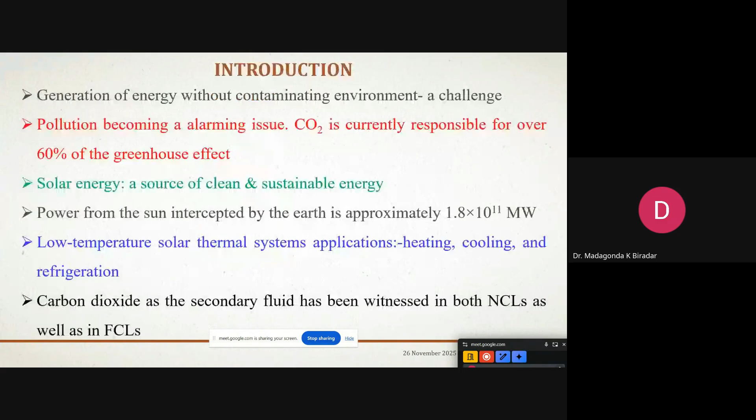So if we move forward, we know the non-renewable and renewable energy sources. Today we are witnessing the price of petrol or diesel. When we were in childhood, the petrol price was around 30 rupees per liter. So today we are witnessing 104 rupees per liter, even though we are not compromising on buying cars or automobiles.

Because of this, the prices are going higher and higher, and we are not meeting the demand of the customers or the world. Even the coal that India has as reserves, we are not having it in pure form. Sometimes we are importing coal from outside. So here the availability is very less.

Even if you consider nuclear energy - we know if you use 1 kg of uranium, it will give tremendous energy or electricity to utilize. But the drawback, we already know about Marie Curie - how she did all the research on that.

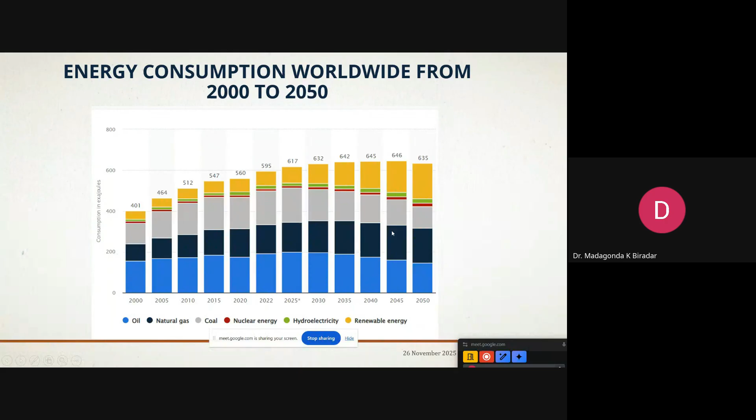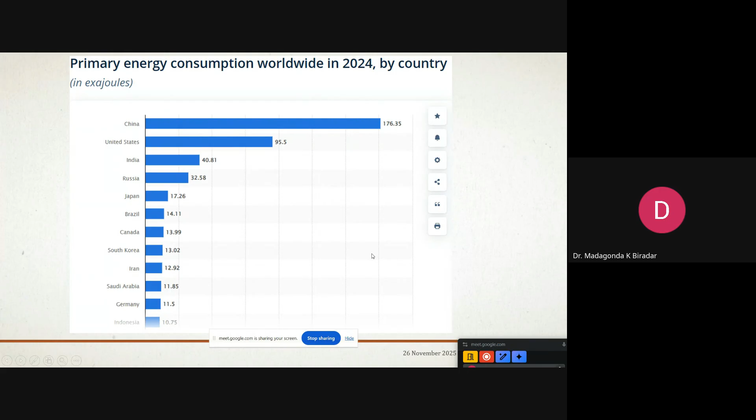So one should think about alternative resources. As we already discussed about renewable energy sources, solar stands in first position. Let's see how we can utilize solar energy.

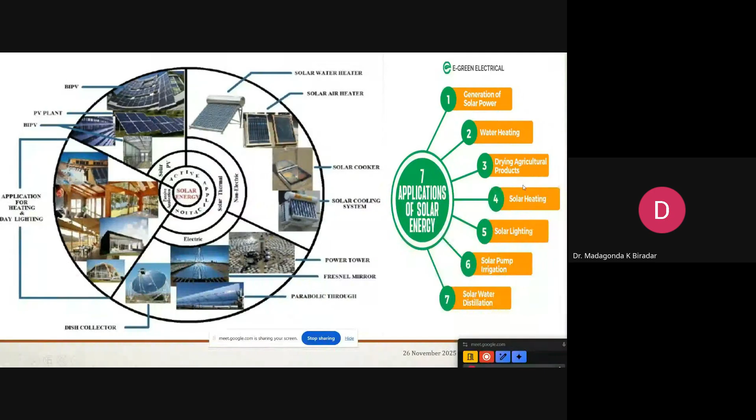So there are 7 different applications of solar energy. That is the generation of solar power, water heating, even drying agriculture products, solar heating, solar lighting, solar pump irrigation, and solar distillation.

So now, out of this, we are diving towards the solar water heater system. This is the basic one which everyone requires, right? So we are getting the solar energy for like vitamin D. At the same time, everywhere in India or throughout the world, the heating of water mainly, basically, we are using the solar energy.

So there, the concept, if you think about the solar water heater, the world's first solar collector was invented in 1767 by the Swiss researcher Horace de Saussure.

And later, there was advancement in the solar water heater, because what happened in the 20th century, because of World War One and Two, there was a crisis of energy. Because of this, what happened? The spiking of oil prices, right? So that made more research or dive into solar energy development even further.

So that's why, if you're all aware, from the last 15 years we are having more focus on solar energy, mainly installation of PV cells and as well as installation of solar water heaters.

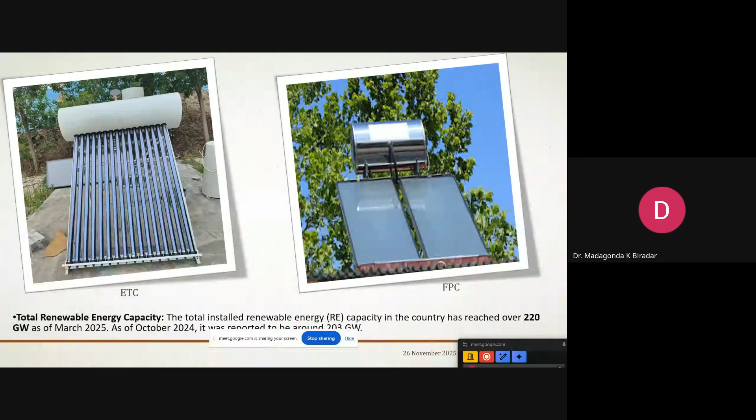Why not the flat plate collector? And why am I more focusing on the flat plate collector? So we can see here. If you see the comparison of this ETC and flat plate, as we know, quick heat generation happens in the ETC because of the vacuum. But in a flat plate collector, what happens? It will be like a box where the solar energy has to be absorbed by the absorber, which will take more time. So that's why the efficiency of the ETC is more than the flat plate collector.

So even the convection and convective losses are low here, but in the flat plate collector, because of the box, we have to insulate from all sides apart from the top layer, right? So there the losses will be more. As we know, if the temperature of the surrounding increases, then the absorber temperature also increases, and because of this, the losses will be more.

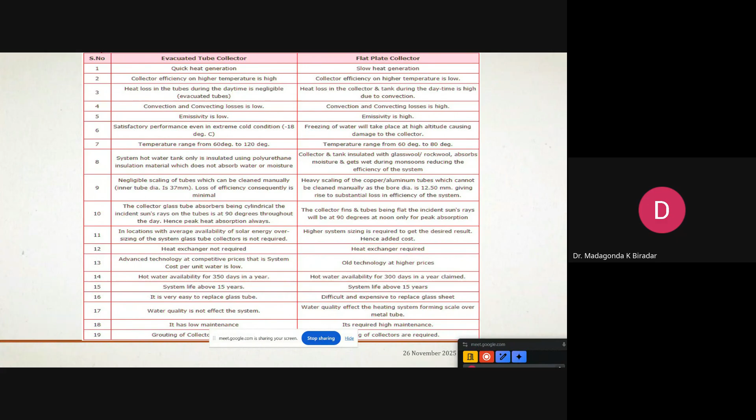So we will discuss that later. If you compare the ETC, the emissivity is also less, right? Then the temperature range of the ETC will be around 60 to 120 degree Celsius, but in the flat plate, 60 to 80 degrees. Like we have the advantage. If you compare the flat plate and the ETC, we have all these advantages in the ETC.

But why am I focusing on the flat plate collector?

So one should think about this flat plate collector, because even if you see the price of the ETC and the flat plate collector—the flat plate collector is almost maximum 10,000 rupees for 150 liter capacity, or even less than that. But the ETC cost will be more than that, almost double.

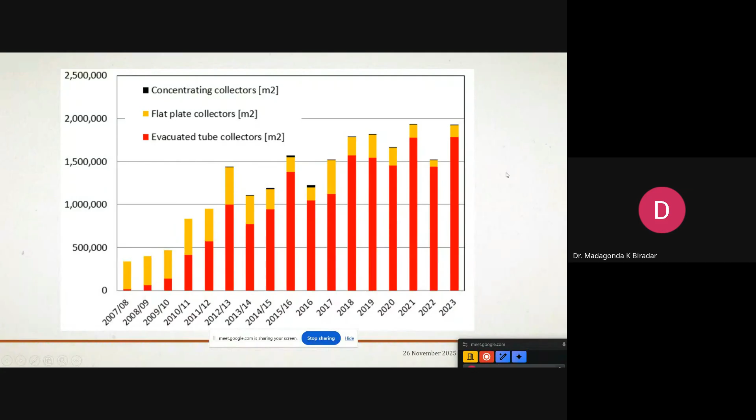So the applications of this flat plate collector, here we are seeing different ones in yellow color. Where these are installed—mainly if you consider hospitals, guest houses, hostels, where the maximum number of human beings are staying or the requirement of water is more—there the cost also matters. So flat plate collectors are installed in such applications or locations.

So that's why we were focusing on this flat plate collector instead of ETC earlier, so that we can improve the efficiency of the flat plate collector, so that every individual can have the flat plate collector in their home or their places. Before moving to the improvement in the flat plate collector...

I will tell about the different circulations of this loop or cycle. Mainly, if you see the solar water heater, we are not using any pump or heater in the solar water heater.

But today we even have that provision, like winter—it has started. If you go to North India, the temperature today, even in Pune region, we are witnessing around 10 degrees Celsius. But if you go to North India, it will be less than 3, 4 degrees. So there, today if you go and buy the solar water heater system, there the suppliers have the provision that a heater will be installed.

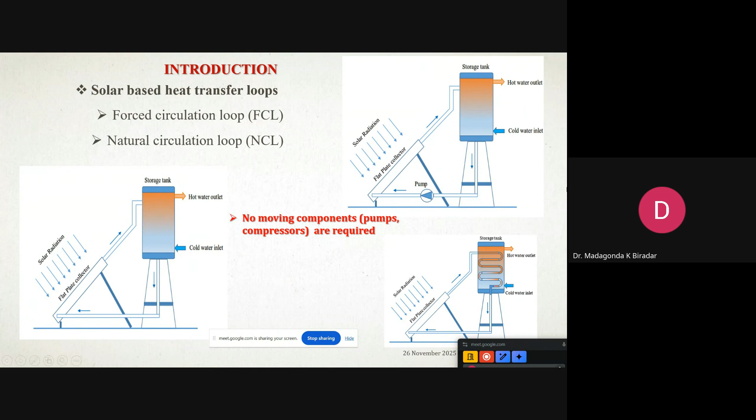So that is the natural circulation loop, which is a closed loop, which we call the natural circulation loop. It's not only used in heating - even in the nuclear power plant reactors, we use this NCL, that is a natural circulation loop. So one should utilize this natural circulation loop so that we can minimize energy consumption.

So in a natural circulation loop, whatever fluid is inside, it may be different fluids, which is absorbing heat from the solar radiation in a collector, and exchanging the heat in the storage tank. Circulation of this loop is maintained due to the buoyancy effect - that's why we call it a natural circulation loop. The fluid flows because of the density difference and the buoyancy effect.

So almost this solar water heater, which is inclined, normally up to 45-degree inclination - because of this inclination, the heated fluid will go to an upper level. This happens because of the buoyancy effect. Now if you come towards this natural circulation loop, there are different types of loops, depending on the applications.

If you see these figures, one is the point heat source and point heat sink, toroidal loop, or rectangular loop. There are different types of applications. If you consider the shape of the loop, this shape, whatever we see in the toroidal loop, even the tube and tube heat exchanger, like that.

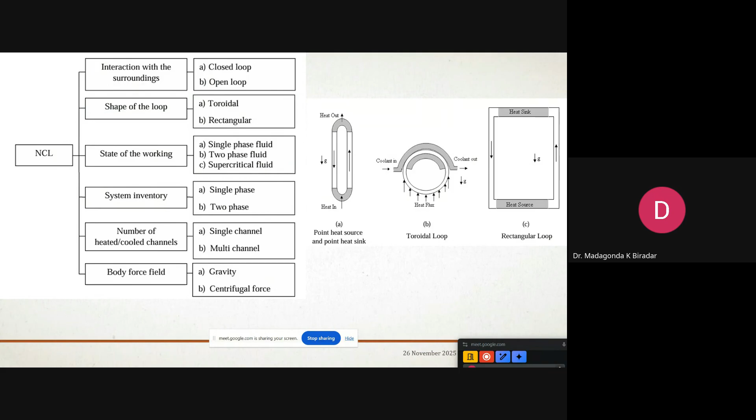So what is the advantage of this NCL, or the natural circulation loop? We are not using any blower or compressor. Because of this, it has low cost and becomes simpler. And as I told earlier, no pumps are there. Because of this, improved flow circulation happens, and flow has different structures and safety concerns.

So because we are working with atmospheric pressure, the disadvantage of this NCL is that it requires the driving head, as we discussed in the earlier slide. In the morning, it is very difficult to get hot water from the solar water heater. That means the driving force requirement is more. That is one thing.

Then less mass flux. The amount of flow of the fluid is less, so it will have instability also. Sometimes in an inclined pipe, when the fluid gets heated, the heated fluid again comes in contact with the low temperature fluid, so it mixes up there itself. That's why instability comes into picture, and low pressure, low flow regime also happens.

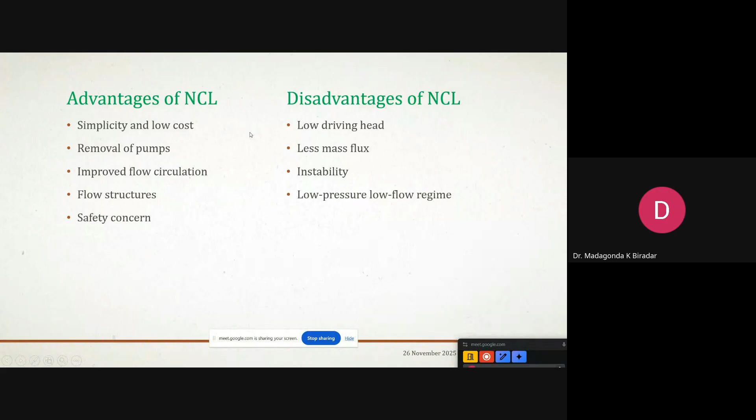So one should have proper utilization of this NCL, which depends on the selection of the working fluids. To overcome these disadvantages of NCL, we should have proper selection of these working fluids.

The fluid we use should be low viscous, and it should have a low freezing point. Even see the example of putting nitrogen in the tires of automobiles, because the expansion or heat carrying capacity will be more, meaning it will not get heated as much as normal air. Even though air has more nitrogen percentage, we put pure nitrogen into the vehicles.

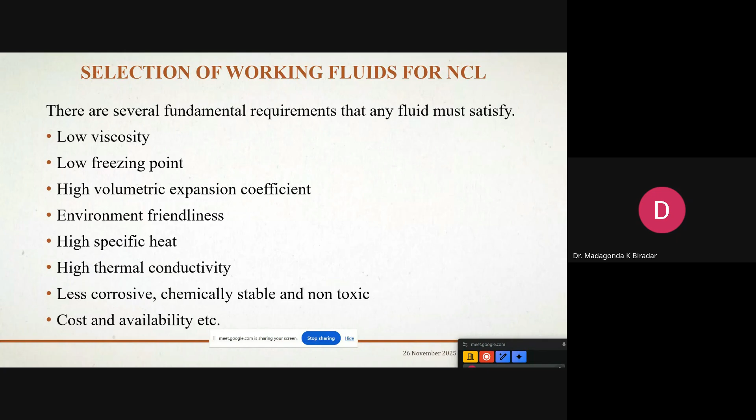So in a solar water heater or natural circulation loop, one should think about all these points: low viscosity, low freezing point, high volumetric expansion coefficient, because once it gets heated, it should expand, meaning that should be high. Environment friendliness, high specific heat, high thermal conductivity, non-corrosive, chemically stable, and non-toxic. Also it should be available abundantly everywhere in nature, and cost should be minimized. If availability is more, then definitely the cost of that thing will be less. So one should think about this while selecting the fluids.

So this natural circulation loop, as we discussed earlier - what are the different applications of these things? One is the solar thermal system, for example the solar water heater, or geothermal power plant.

We are not going in detail, but this is where we use the natural circulation loop - whatever heat energy comes from the heat source up to the turbine, the natural circulation loop plays a vital role. Then also in thermal power plants like boiler furnaces, even today they are using NCLs. Even if you go to a sugar factory, there are superheaters there using the natural circulation loop.

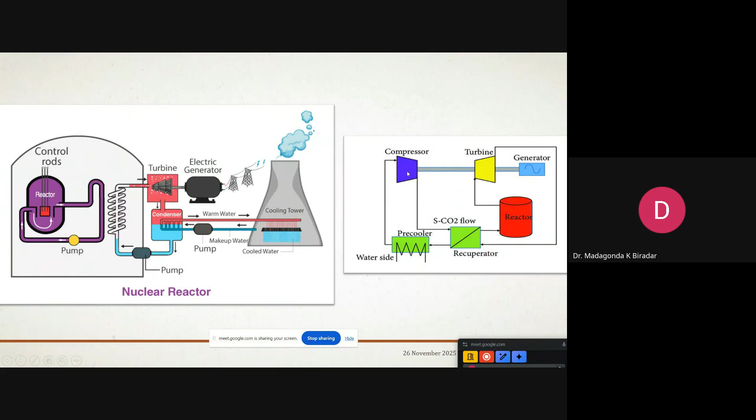And while using the natural circulation loop, there are different fluids available, like the refrigerants we use. If you see, every 2 to 3 years or 5 years, we get different names of refrigerants, right? So the suitability of all these refrigerants or secondary fluids is very important.

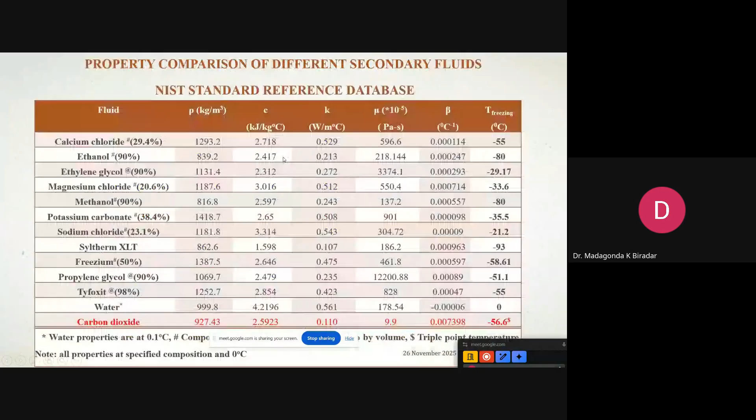So this we analyzed with the help of RefProp. RefProp is a software where we can get all the different physical properties of any fluid. If you compare CO2 liquid at 60 bar, we see solid, liquid, and supercritical phases. Supercritical comes after 31 degrees Celsius, and the liquid phase is from minus 57 degrees up to 31 degrees Celsius.

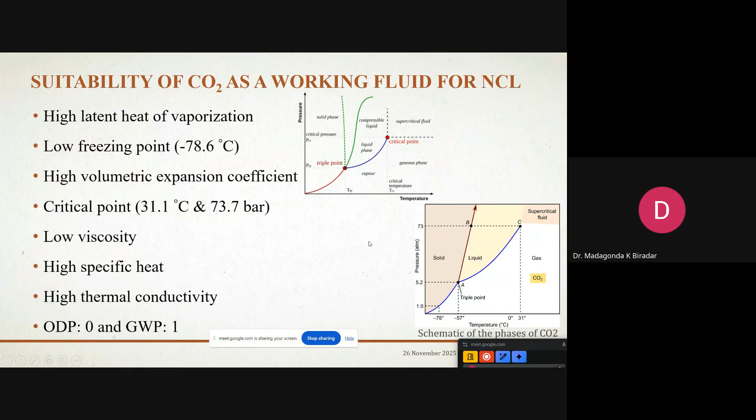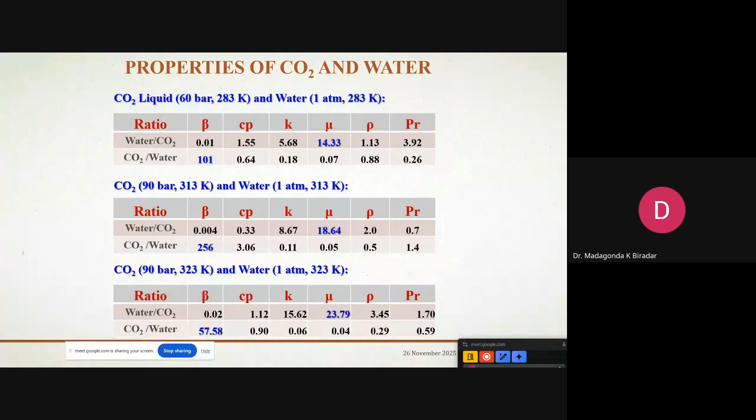If you see again the supercritical at 323 Kelvin, means 50 degrees Celsius, the CO2 to water ratio is again decreasing a little bit. This we'll discuss later, because what happens is even in a solar water heater, as the outside temperature increases, surrounding temperature increases, the efficiency of the collector also decreases. We'll discuss that. So we got the result in terms of different pressure.

We compared this water-based system with the CO2-based system. Water is normally used at 1 atmospheric pressure, but CO2 at different pressures, 50, 60, 70 bar. Here the T average is 283, which is in liquid phase, and T average is 323 K, which is in the supercritical.

If you see these two figures, the heat transfer rate - this bottom line indicates the water line, with a star in the water line, and with increase of pressure with the CO2. The blue line indicates 70 bar, then red 60 bar, and black is 50 bar. If you compare CO2 with water, increasing the pressure, CO2 is far better in the liquid. Even at lower pressure, it gives better results than water.

At the same time, for the supercritical, water is at 1 atmospheric, but 80 bar is just below this water line. This we will discuss later, because the pseudo-critical temperature, pseudo-critical point comes into picture here. Even at 90 bar, which has more heat transfer, than if you see the temperature difference, delta T, means inlet and outlet temperature, here it is up to 400 watts.

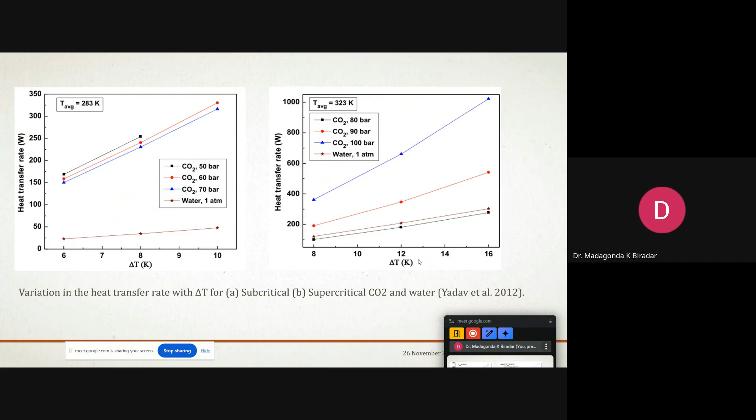Okay, so here what happens - the CO2 supercritical based system will have the more advantage.

So with this, what we observed is that the major studies have been conducted on direct type water-based solar thermal systems, as currently we see all the rooftops with solar water heaters. But there is a scant of research on indirect type CO2-based solar thermal systems. Meaning instead of direct water, we can use different fluids in that loop and utilize it with the help of a heat exchanger. So that is not available in the market as well as in society. That's why one should have proper research with experimental and numerical studies on this. So that's why we are more focusing on the flat plate solar collector.

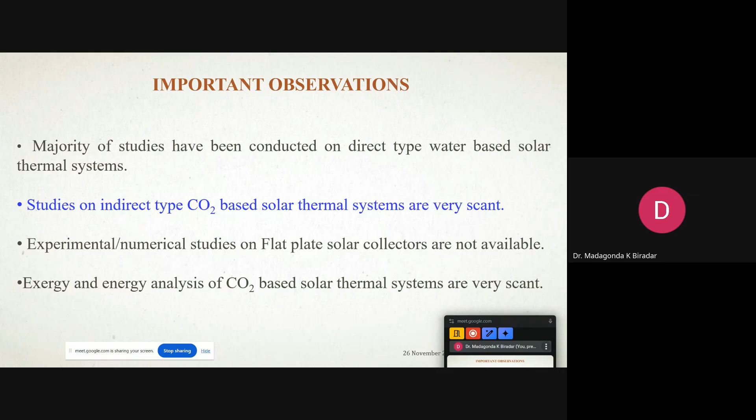If we do good research in this area of flat plate solar collectors, maybe with experimental, numerical, or energy analysis, it will definitely give more advantage than the ETC. There we can also minimize the utilization or cost of the system.

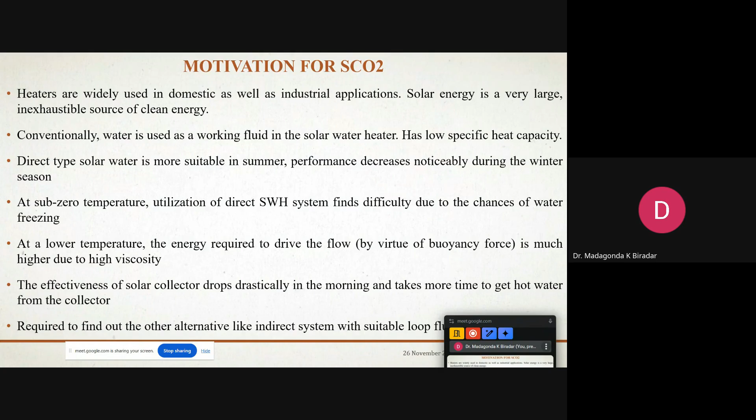So this is the motivation for this supercritical CO2 based, direct type solar water heater, which is more suitable only in summer, but in winter water will freeze. That's why the driving force required will be more, and sometimes the system will burst.

So we thought to work with CFD analysis, as well as numerical analysis and experimental work. This is the system where we converted the normal one—actually, this is not a converted one, we fabricated it ourselves with compatibility for the CO2 based system.

Normally whatever tubes we use inside this collector are copper tubes, but copper is not suitable for higher pressure, because CO2 has a critical temperature of 31 degrees Celsius, where it reaches up to 73 bar. This summer we witnessed temperatures up to 50 degrees Celsius. You can get the data from RefProp—at 50 degrees Celsius, the pressure will be very high, which is very difficult for copper tubes to handle.

So here, this is the schematic diagram of this CO2 based solar thermal system, and here we have the inclination of this collector. This is where we can make different inclinations depending on the different geography, altitude, and latitude of that particular location.

Here we made some assumptions: the loop fluid and external fluid streams are in single phase—we did not consider multi-phase since that is very difficult to analyze. The external pipes of the heat exchanger, bottom side, and solar collector are all perfectly insulated since we're considering a flat plate collector. Water properties are estimated at the inlet temperature itself, and fouling in the loop is neglected entirely.

We did the energy analysis as well as the exergy analysis. For energy, you can see here, Q equals MCp delta T, the total utilization of energy, which is nothing but the absorbed energy minus losses.

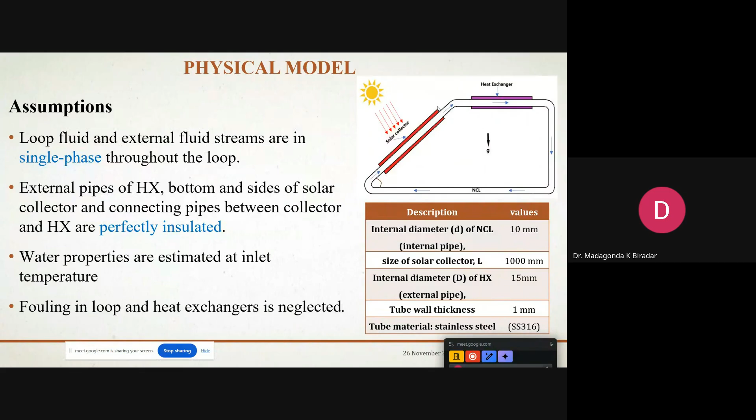In a solar water heater, losses will be more. The absorbed energy depends on transmittivity and absorptivity—considering tau and alpha, that is the absorptivity. The utilization is nothing but MCp delta T, where T out is the fluid coming out of the collector, and T in is the inlet of the collector. Then the losses happen at the top of the collector, as you can see here.

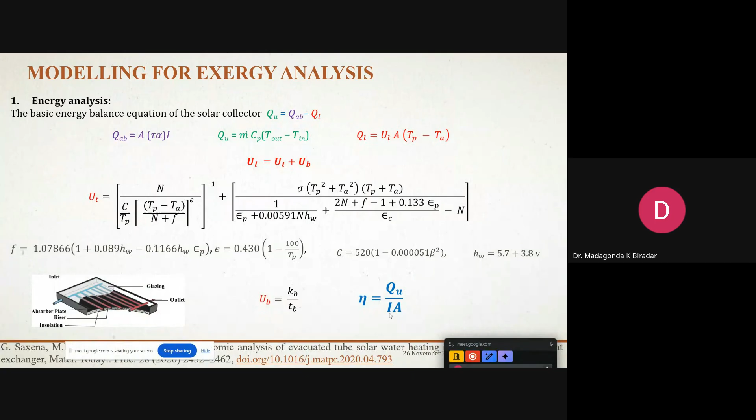TP is the plate temperature, TA is the ambient temperature. As the ambient temperature increases, losses will be more, as we have seen in the second session. So here the efficiency we can find out with the help of useful energy, then intensity with the area, that is the efficiency.

The second consideration, the flowing fluid and the absorber plate. Because the fluid is flowing below the absorber plate, there the temperature difference will be there, as well as the pressure drop due to the friction of this fluid inside the tube. Considering this, we have done the exergy and energy analysis.

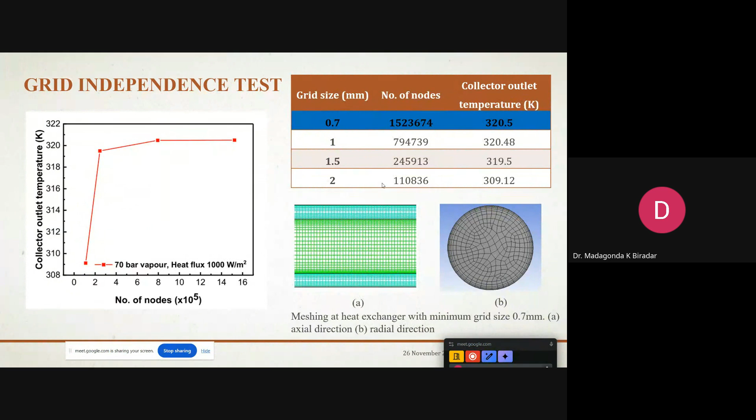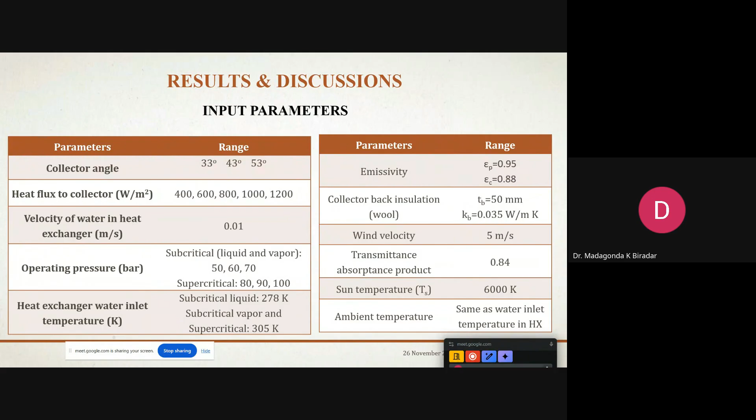So these are the different input parameters for the exergy analysis and the energy analysis. We did the validation with previous researchers also, so that whatever we are doing, whether it is correct or not, we have to validate it. We almost got 4% deviation in this, which was really good for further research.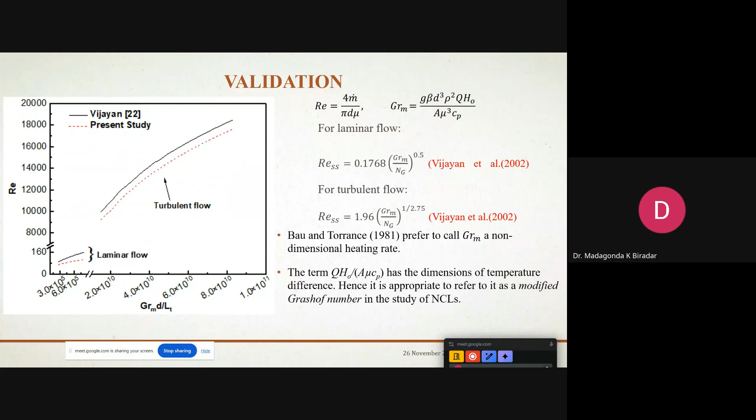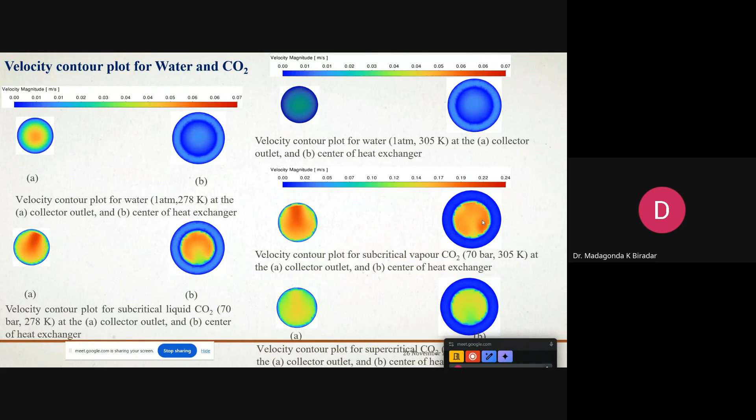This is the graph where the temperature at 305 is more - this is for the supercritical phase of the fluid. If you see, this is the center of the heat exchanger. After giving energy to the water outside, the fluid has less temperature here. That's why the velocity contour shows velocity is less here, because all the energy is given to the water. So this is the velocity contour for the CO2 and the water.

We have also compared the Reynolds number with the heat flux. Reynolds number is very important for finding the heat capacity or heat transfer - we say laminar or turbulence.

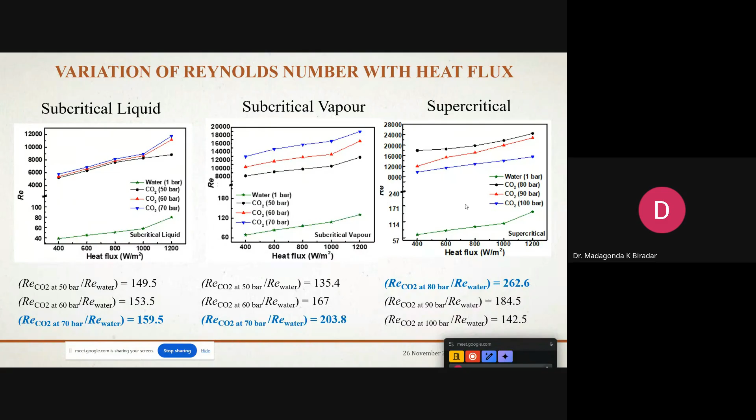Comparing with this slide, we can say the Reynolds number of CO2 at 70 bar compared to water was almost 159 times more. In subcritical vapor, it is almost 200 times more. But in supercritical, it is 262 times more. So comparing supercritical CO2 based thermal system with the water system, it will give a better result than the normal direct type of water heating system.

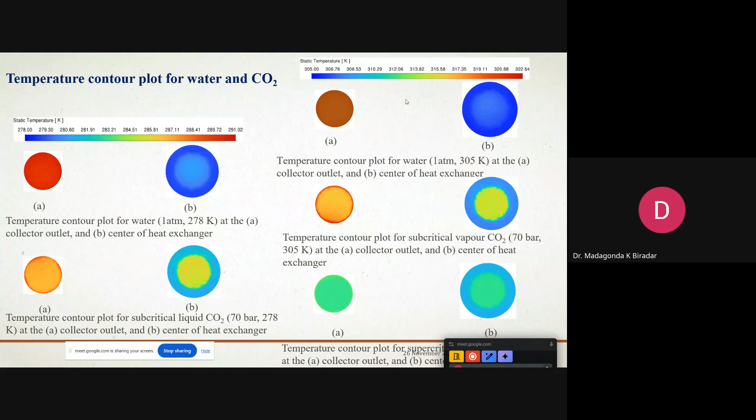At the same time, if you see the right side of these figures, for the supercritical case, after giving heat to the water, whatever fluid comes from this heat exchanger has less temperature. If you see this temperature range, from 305 to 322, this is where the CO2 fluid coming from the heat exchanger has less temperature, which is again the beauty of CO2.

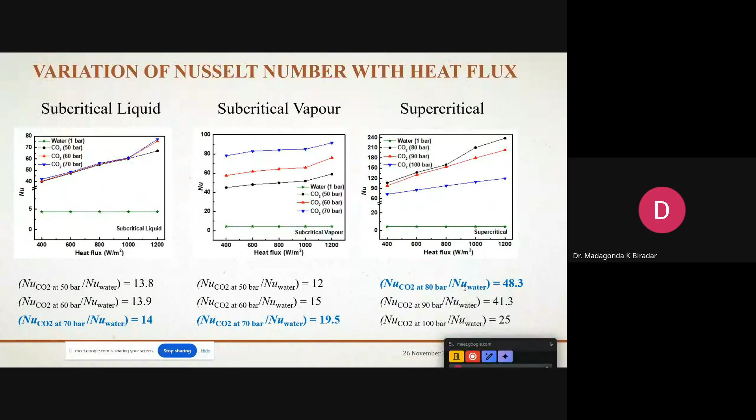With this, we also did a comparison with the Nusselt number, that is convection to conduction. For water it was almost constant, but for CO2 it was increasing from subcritical to supercritical, and from liquid to vapor to supercritical. Almost in the supercritical phase, we got a better comparison from CO2 to water. So this is about the Nusselt number.

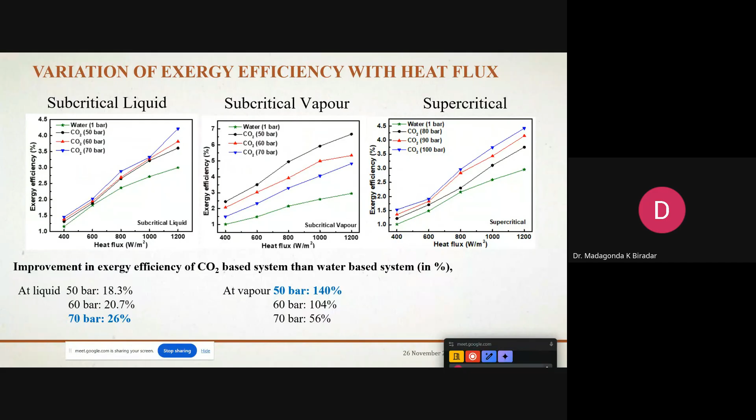You can see at the bottom, the heat flux values of 400, 600, 800, 1000. Here 400 means the intensity we get on earth. Even low intensity is 600; normally the maximum is 1200 watts per meter square, but due to attenuation from the ozone layer, we get less than that. So we considered different cases from 400 to 1200. This was the result we witnessed.

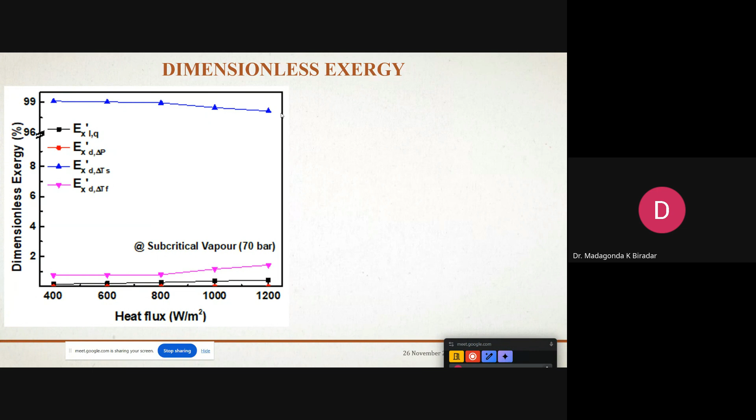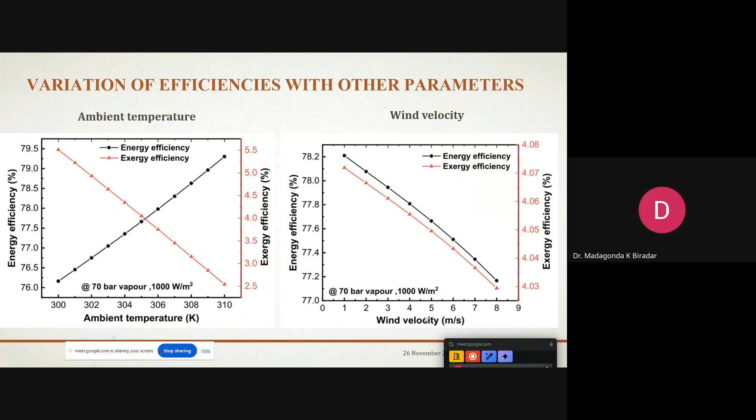If you consider wind velocity, convection also matters, with the heat transfer coefficient HW. With different wind velocities, both exergy and energy efficiency get decreased.

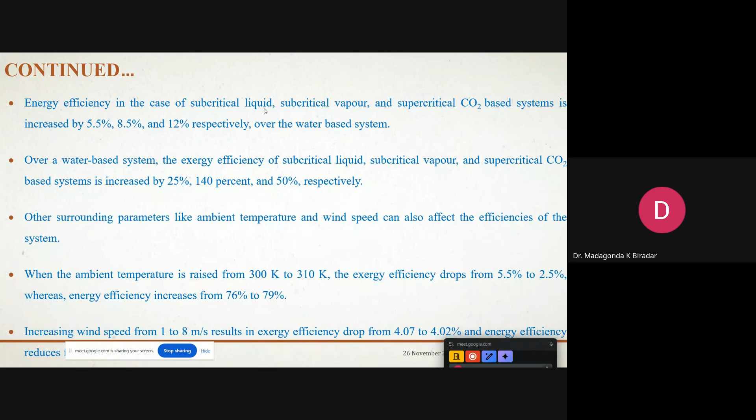So with this, we can say that CO2 based solar water heater yields a very high mass flow rate. For the same heat flux, comparing water based and CO2 based systems, the CO2 based system in supercritical state gave better Reynolds number as well as better Nusselt number, and energy efficiency was high, almost 5.5% more than water based in the subcritical liquid case, and 12% more in the supercritical liquid case.

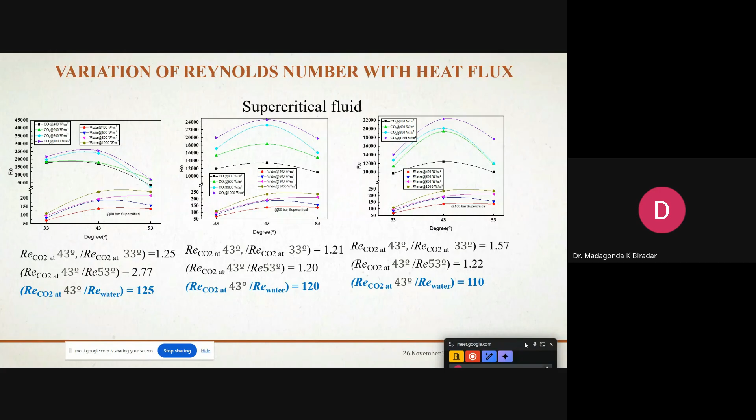With this, we also did simulations for different temperatures - earlier it was only for 33 degrees Celsius, but we did simulations for 43 and 53 degrees Celsius as well, with the same parameters explained earlier. For 43 degrees Celsius, we got better results comparing CO2 itself at 33, 43, and 53 degrees Celsius across all parameters. We witnessed that 43 gave the better result for subcritical liquid, vapor, as well as supercritical fluid.

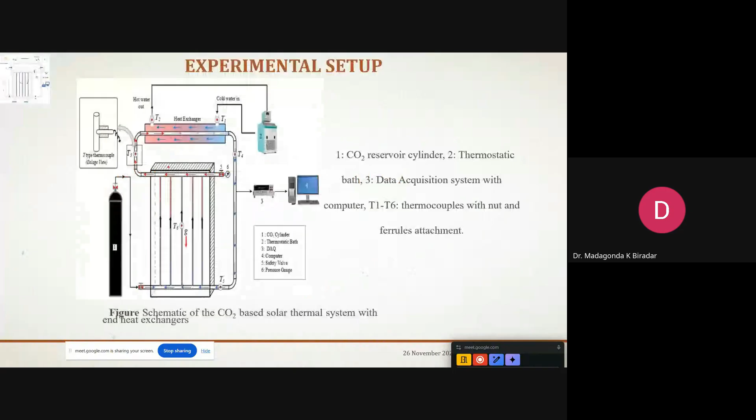Also, this is the experimental setup. We carried out all the testing.

Just 5 minutes, sir, I will finish it. Yes, sir, no problem.

This is the fabrication which we did ourselves, and we have tested it. Because this system has to withstand more than 100 bar, here you can see we tested up to 125 bar.

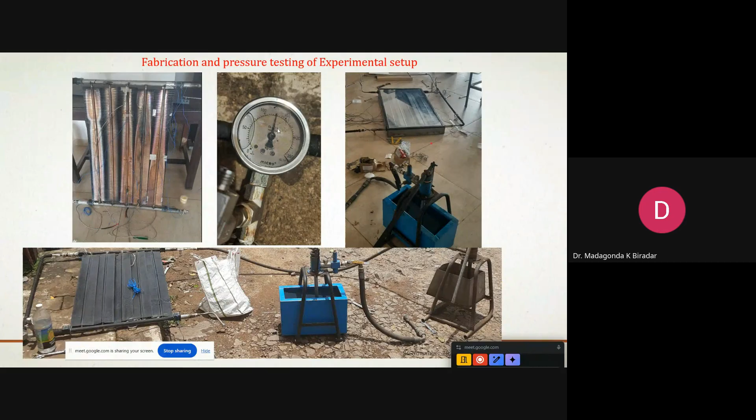Even I tried for 200 bar pressure. Okay, so we did the fabrication. We even did the vacuumization of the system. Then this is the setup. We had the thermostatic bath to maintain the temperature.

Every time we are not getting the sunlight, right? As researchers, we are more focused on the results, so we should not depend on the natural calamities. So what we did, we made our own artificial sunlight. We made the arrangement with whatever sunlight having all these infrared rays, ultraviolet rays, everything. Considering this, we set up different configurations and did the experiments.

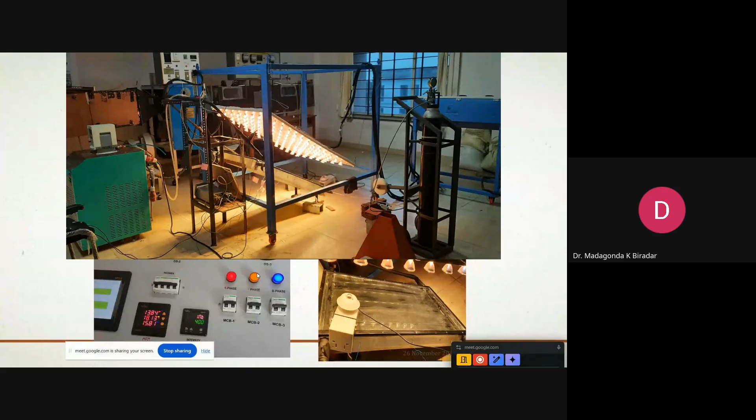So here, if you see, this is the experiment. We even measured the intensity of the heat falling on this collector. So you can see here for 400 what was the intensity. We are maintaining 400, 600, 800. Even in the experiment we did the same thing. And this is the CO2 cylinder where we have safety valves, everything.

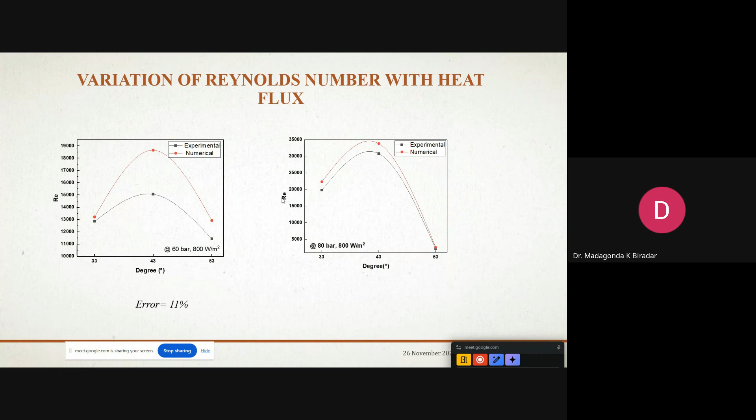With this we did the comparison of the Reynolds number and the tube temperature. If you see, for 33, 43, 53, we got the better result of the Reynolds number at 43 degrees Celsius in the experiment also. When we compare the error correction between numerical and experiment, it was almost 11%, which is comparatively minimum.

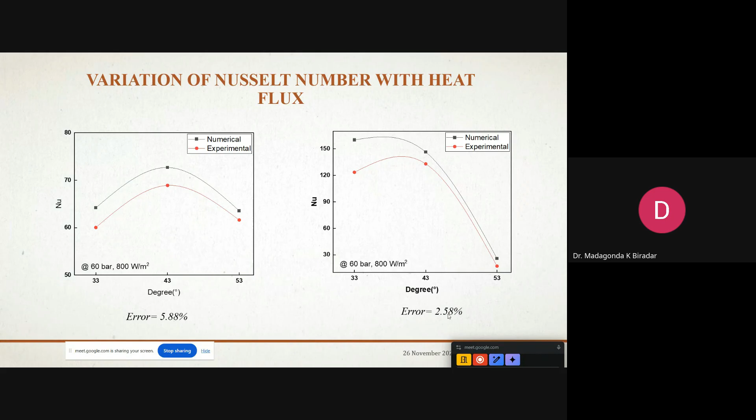Experimentally we had 11% error compared with the numerical result, because it is very difficult to maintain all the criteria in the experiment, since with CO2, the pseudocritical behavior is not in our hand, and it is also not transparent. That's why this is the error we got, almost 11%.

And if you see in case of Nusselt number, we got 5.8% and 2.5% error, that deviation we got in the experimental results.

Overall, if you see, we got better results in the experimental as well as the numerical, so this is not only restricted to the solar water heater, the same thing we can utilize for electricity generation also in a power plant. So these are the different publications we did.

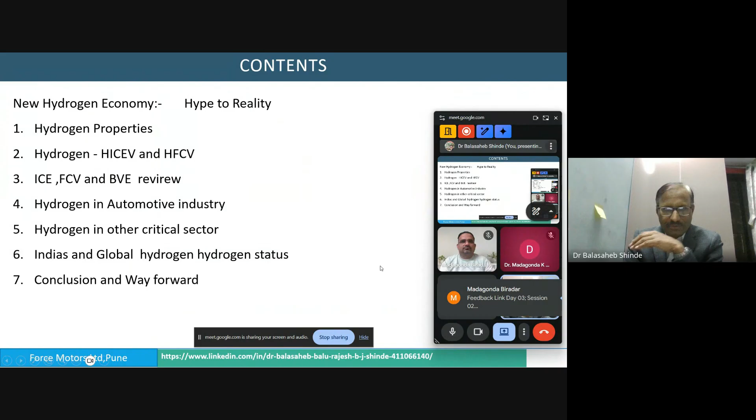Today's subject is the new hydrogen economy: hype to reality. Till yesterday everybody was talking about hydrogen being hype, whether it will work or not, or whether it is only competition. Multiple questions were raised. Now in the next session we'll talk about it.

To start with, we will go through some hydrogen properties, then compare hydrogen with the internal combustion engine vehicle and fuel cell as a competitor or supportive technology. Then comparison of internal combustion engine, fuel cell, and battery electric review, then hydrogen in the automotive industry, hydrogen in other critical sectors, then India and global hydrogen status, conclusion, and we move forward.

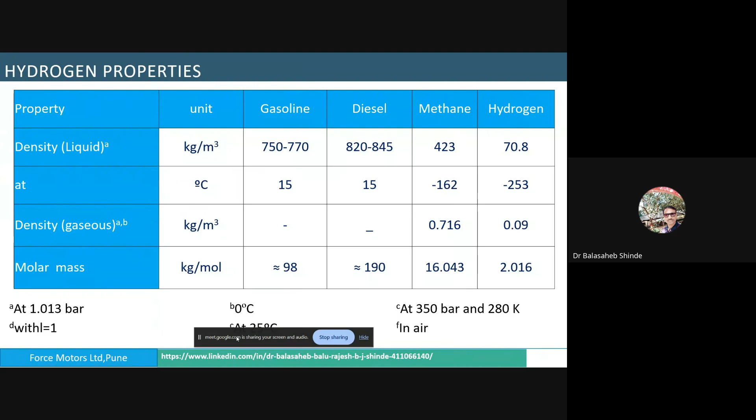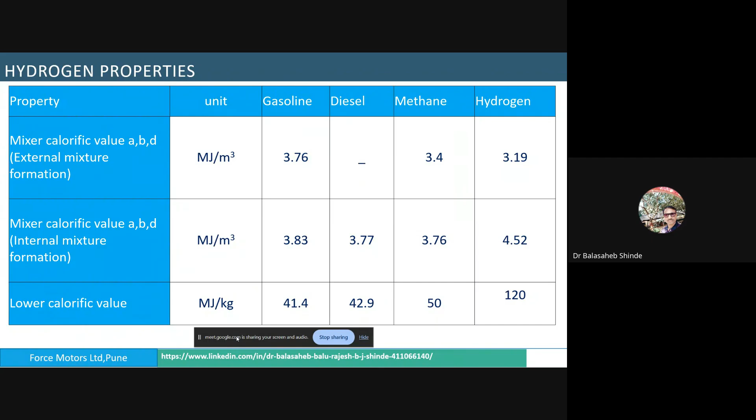Then calorific value in different conditions: hydrogen is 3.19 megajoule per meter cube, against methane's 3.4 and gasoline's 3.76. Mixture calorific value for internal mixture formation is gasoline 3.83 megajoule per meter cube, against hydrogen's 4.52. On a megajoule per kg basis, gasoline is 41.4, methane is close to 50, and hydrogen is 120, indicating hydrogen has the highest calorific value.

CO2 formation: since no carbon particles or molecules are available in hydrogen, there are no CO2 emissions. Gasoline and methane have some carbon atoms, so they form CO2.

Then the Wobbe Index, an important property for fuel use, measured in megajoule per normal meter cube, is close to 40.65 to 48.23, against methane which is a gaseous form. This property is used for gaseous fuel applications, at 47.91 to 53.25 for methane.

This depends on the methane percentage, that is CH4 percentage, in the methane gas. Then stoichiometric air-fuel ratio: gasoline is 14.7 against hydrogen's 34.3, indicating hydrogen requires more air. Methane is 17.2.

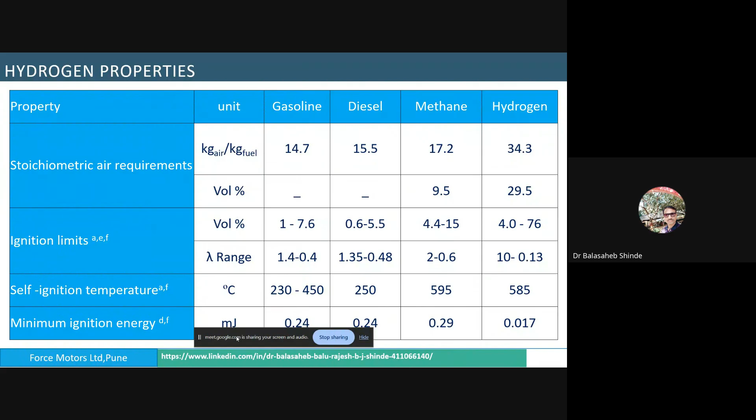The mixture calorific value depends on the fuel properties. For gasoline it is around 3.59. If you go with port fuel injection, it displaces the air, so mixture calorific value reduces. But if you go to cryogenic port injection as well as direct injection, it increases.

Specific power means how much power we get. If you consider gasoline as 100%, then with port fuel injection hydrogen, it is 83%, a 17% drop. Then cryogenic port injection gives a 15% improvement, and direct injection gives a 17% improvement over the base gasoline engine.

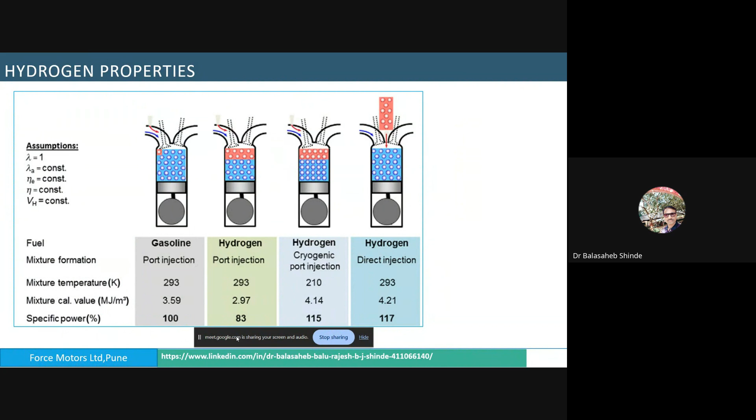On the importance of the hydrogen ecosystem in India: hydrogen is emerging as a crucial element in the transition towards a sustainable future. India's green hydrogen sector has significant growth potential, with a projected CAGR of about 20% between 2025 to 2030, driven by robust policy such as the National Green Hydrogen Mission.

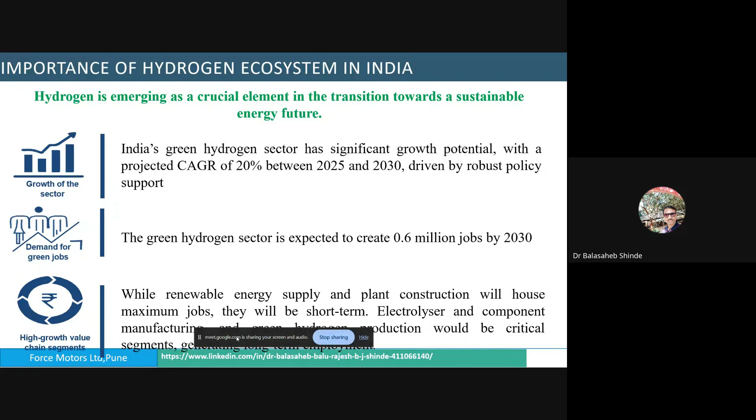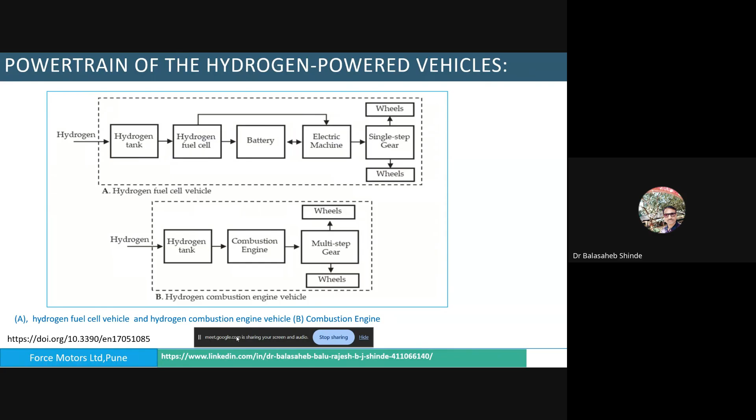Average powertrain efficiency of internal combustion engine versus hydrogen fuel cell vehicle: there are different cycles for different testing purposes, such as WLTP. Efficiency-wise, the IC engine is around 25%, and hydrogen fuel cell efficiency is around 45%. So in all cases, hydrogen internal combustion engine vehicles have lower efficiency than hydrogen fuel cell vehicles.

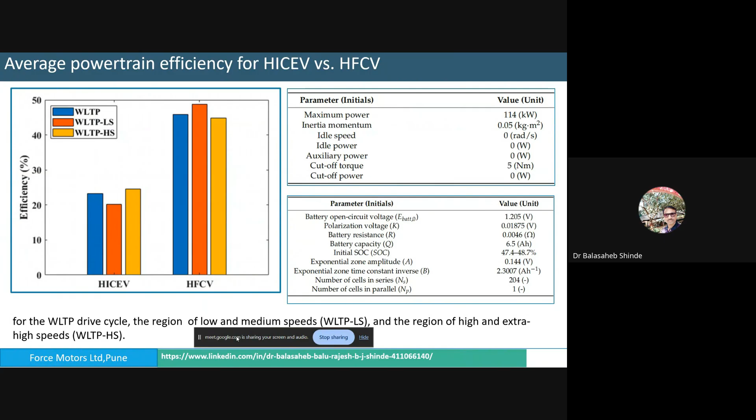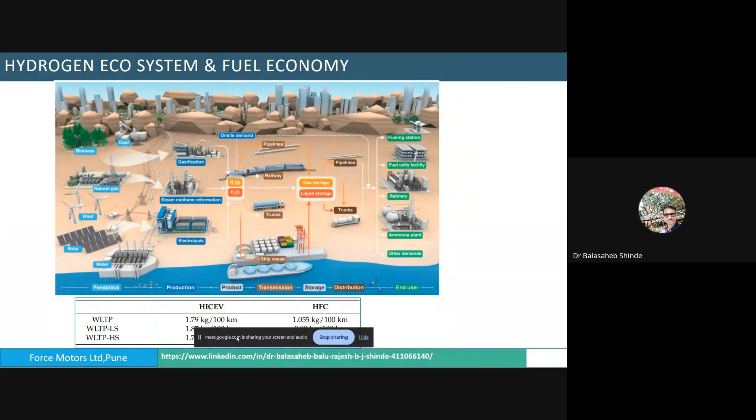Hydrogen ecosystem: we start with where hydrogen is produced, then how it is stored, how it is transported, and what are the sources of the hydrogen economy, and where it is to be used. Wherever you are using existing diesel, petrol, or any source of energy, hydrogen can be used there.

Hydrogen is a lighter gas, so we have two ways to use it: either compress it to a high pressure, or make the hydrogen in cryogenic form, meaning cool down the gas to a lower temperature or subcritical temperatures for different applications. For this, different types of tanks are being developed: type 1, type 2, type 3, and type 4 tanks. At present, type 4 cylinders are being used for hydrogen applications.

Volume density, meaning how much gas is filled per liter in kg: type 4 cylinders hold 38 to 40 grams per liter.

The useful life of all these cylinders, type 1 to type 4, depends on the material of the tank and how it is built and the procedure used. Type 1 is a metallic tank, against type 4 which is the latest technology, where a plastic liner is wrapped with carbon fiber or glass fiber reinforced epoxy resin, making it a much lighter cylinder.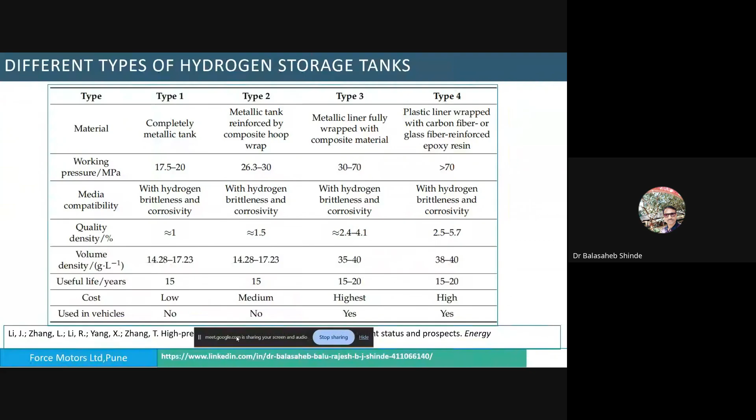There is one parameter when you work on any fuel for different applications: the flow rate is directly proportional to the square root of pressure and density. For the same hole size and pressure, hydrogen volume rate is 2.8 times that of methane. Compared to methane, hydrogen inventories will depressurize in a shorter time, potentially producing a bigger flame with a shorter duration. That is how flame speed and burning velocity vary with different fuels.

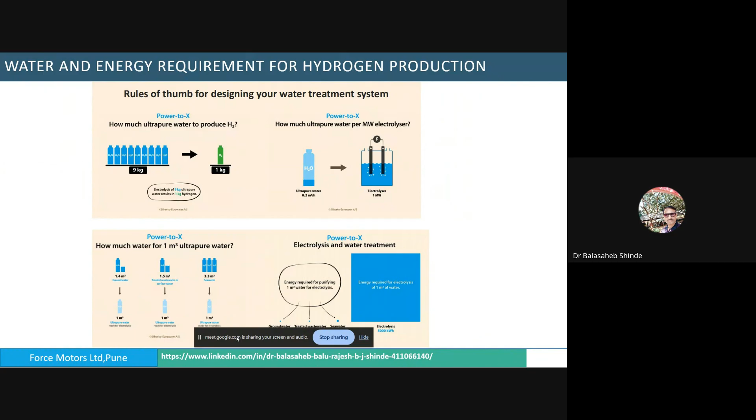Water and the energy requirement for hydrogen production - there are different methods to produce hydrogen, but the main source is water. In water electrolysis, water is split into hydrogen H2 and O2. So how much water is required to produce 1 kg of hydrogen? 9 kg of water is required to produce 1 kg of hydrogen. Ultra pure water required is 0.2 meter cube per hour for 1 megawatt electrolysis. Then how much water is needed for 1 meter cube of ultra pure water? These are the different mathematical calculations that are available.

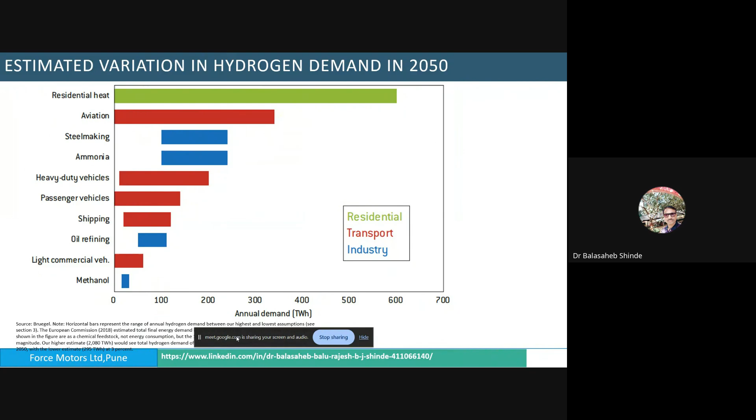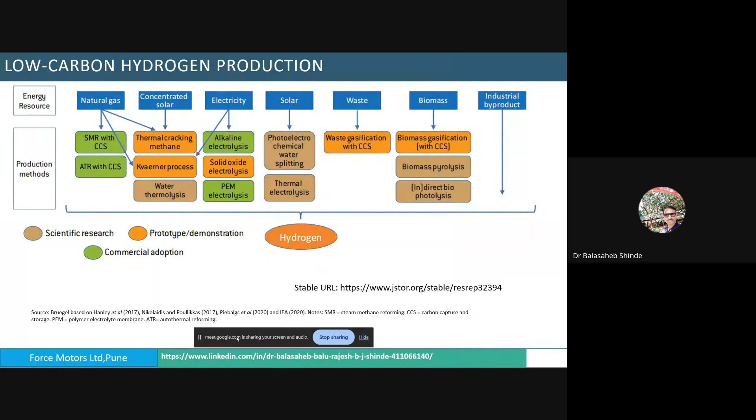Low carbon hydrogen production - hydrogen is produced by natural gas steam reforming process, autothermal reforming, thermal cracking, or concentrated solar, then electricity, solar waste, biomass, or byproducts. So all these products, wherever carbon and hydrogen are present, it can be split and used. The final product - you take any fuel, any gas - if hydrogen is there, there are different methods to separate the hydrogen from the carbon, and these are the methods we have now discussed. So hydrogen can be separated from a number of sources and used for different applications.

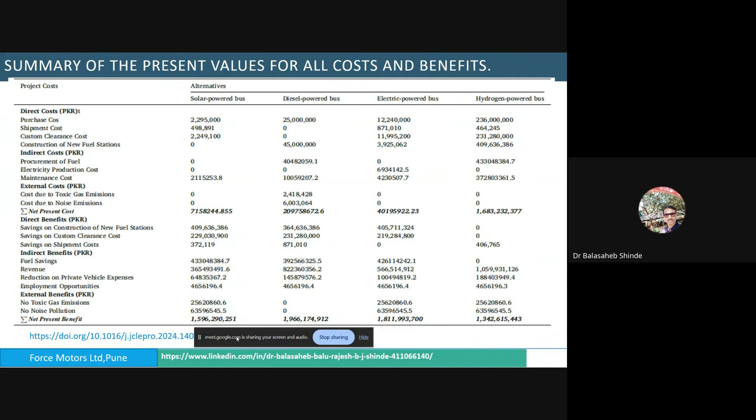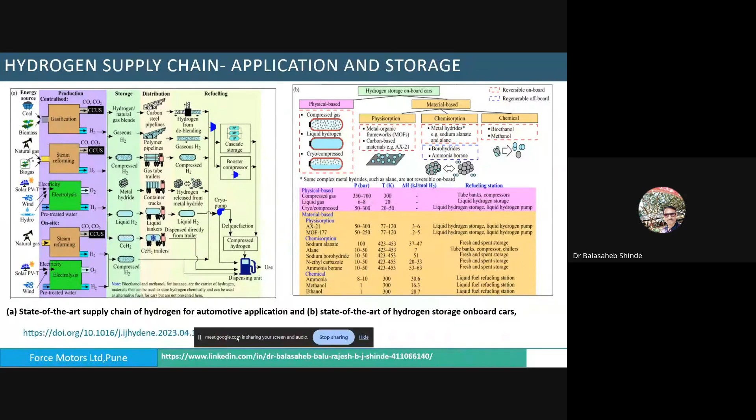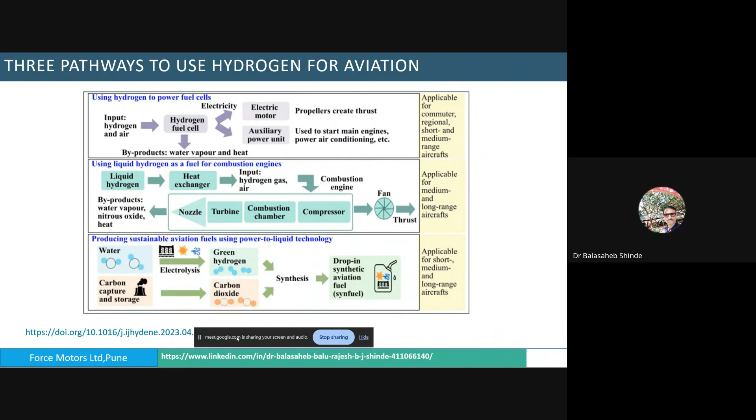Everybody might have understood or learned or been informed by the Prime Minister of India. So we are also developing the hydrogen train in India.

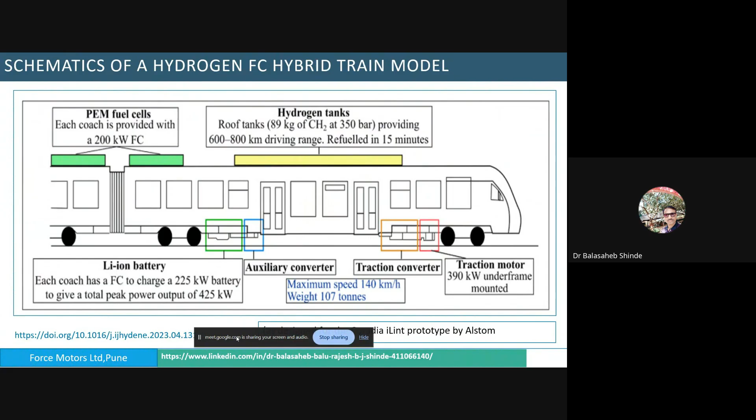History of hydrogen. Hydrogen is not today's fuel. It started as an IC engine fuel in 1807 by researcher de Rivas. First he started working on hydrogen for small applications, and then it started.

There were 3-4, I would say, cyclic developments took place globally for hydrogen as such. Many times it has stopped due to geographic conditions, or availability of fuels, or competition from other fuels and their availability, and multiple questions were being raised 3-4 times. Hydrogen wave came and it has vanished.

But this time, believe me, this time hydrogen will take off globally. That is the only solution people, everybody has understood. And not a single nation has left out working on hydrogen. There are some companies where they started working since 1972 to 2000.

Take example of BMW. First they were being used for luxury applications, small car applications, and then other applications are JCB, Isuzu, and then Porsche also. Porsche is also a company who has been working on hydrogen as a fuel for IC engine specifically.

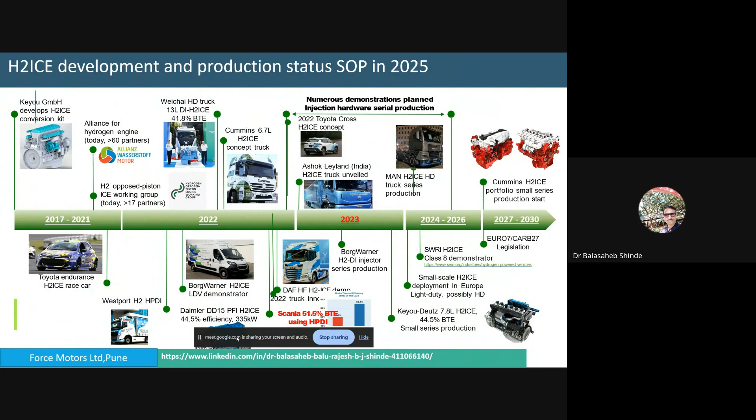Global development - European Fit for 55, meaning the European Green Deal, explicitly allows the H2ICE engine. Earlier they wanted to ban it, but after studying the different applications of hydrogen and its use as a fuel, they again implemented legislation allowing the use of engines with hydrogen internal combustion for automotive applications.

Then United States has CARB heavy duty emission regulations targeting 100% zero emission vehicles by 2045. India has the same strategy - 2023 National Green Hydrogen Strategy focused on production and industrial decarbonization. Then foresee H2FC and H2-derived liquid fuel for transport, hydrogen and NH3 IC engine for different applications.

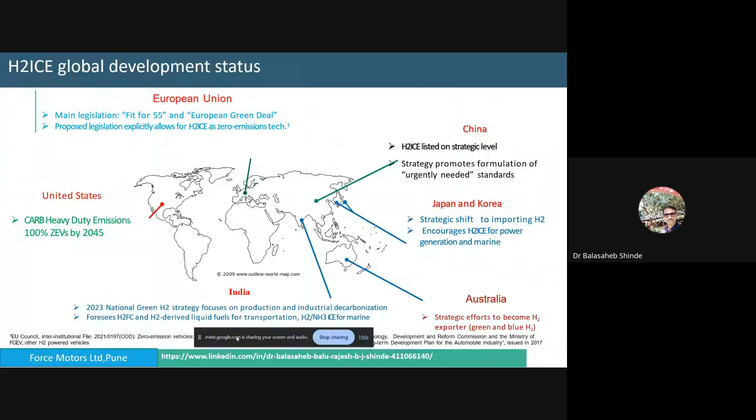We are not left out on the automotive side, but for marine applications also - Japan, Korea, and China, including Australia, everybody has started working on hydrogen. Hydrogen could be different colors: green, blue, or brown - different sources of hydrogen. But the application is what's important.

So India is not behind the globe. We are the fourth largest economy, so we are taking an active role in the development of hydrogen technology. And as I said, we are also...

Last year Reliance developed trucks and buses along with Ashok Leyland. They are on the road, testing is going on. There are other players who have developed their vehicles on hydrogen fuel cells. As I mentioned earlier, there are other applications of hydrogen. A hydrogen train has been developed by the Government of India and will be rolled out for public use very soon.

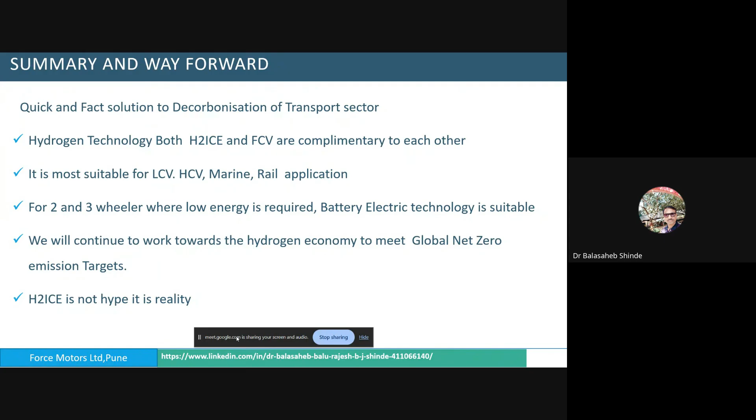That is what we have seen in the sale of two-wheelers and three-wheelers. The three-wheeler is the highest selling electric vehicle in the world. If you look at last year's or this year's electrical vehicle application data, that is why we'll continue to work towards the hydrogen economy to meet the global net zero emissions goals. My intention was to show the presentation quickly so we can take more time for discussion. So certainly, hydrogen is not hype. It has now become a reality, not only in India but in the global sector.